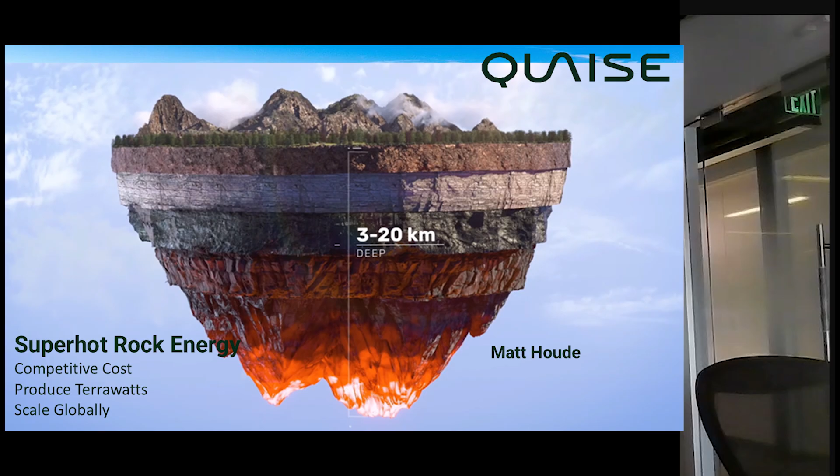This is definitely, as Russ said, some very exciting times in geothermal. Today, I'm going to talk about Quaise Energy and sort of our outlook and approach into how we want to develop and scale geothermal. And if there's one word or phrase I could leave with you in relation to Quaise and sort of our vision, it's going to be this second line here in the lower left, which is produce terawatts, or geothermal at the terawatt scale.

If you may be familiar, world energy demand, not necessarily energy consumption, but online power demand is on the scale of terawatts, something on the order of 15 to 20 terawatts. That's a number that includes all use of electricity, all use of burning fuels for transportation, for heating. And when we talk about decarbonizing the energy system of the US and the world at large, this is the scale that we need to think of.

And Quaise's vision in terms of how we approach geothermal is to realize exactly that, to develop an approach to geothermal that can produce geothermal energy at the terawatt scale, at the same scale at which the existing oil and gas industry adds energy products to the world energy system every year.

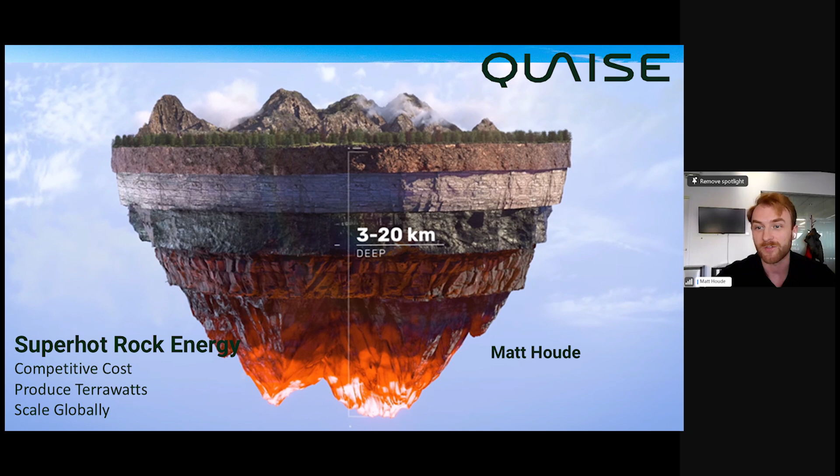Just a brief note on some of our current investors, partners, and industry relationships. A few I'll highlight here is that to date, Quaise has raised close to 95 to 100 million in private venture capital, and we are planning to raise a larger sum sometime this year on the order of 200 to 300 million to realize our goals. We've certainly benefited from our investors, our academic and government partners, especially those within the Department of Energy that helped us very early on with an ARPA-E funded project we had on our drilling technology, and certainly wish to continue those relationships in the future.

But I do think, as a rough order estimate, these are accurate in showing that with our current projections of how we are approaching decarbonization in the energy system, we aren't necessarily close to this goal of realizing a fully decarbonized energy system worldwide in 2050.

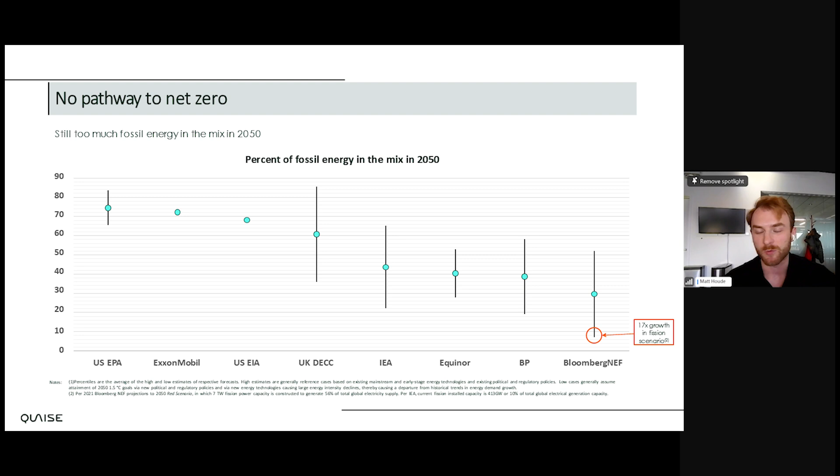Now, that is owing to several factors, one being, of course, that energy transitions have tended to take place much slower than they are currently, although they've not necessarily had the demand or constraint that we currently have with country and nationwide goals to decarbonize their energy system. But something that I think is missing in these projections that would affect the picture is the availability of a scalable, power-dense source of firm, or what you could call baseload, clean energy.

As it stands today, beyond wind and solar, the two leading clean energy deployments today, which are intermittent, our main available baseload source of clean energy to date has been nuclear fission, which is quite limited in its ability to scale rapidly and worldwide owing to various economic and geopolitical constraints. But an untouched fruit here in having a source of clean, firm power for the energy system of the future is geothermal energy.

Geothermal has been developed and deployed worldwide for over 100 years for electricity generation. If you'd like to expand that to use cases of heating, you could say geothermal is one of the oldest sources of energy we've had, in the form of hot springs used for various heating needs. But for the past 100 years, geothermal has been tapped as a source of energy to produce electric power at temperatures typically ranging from 200 to 300 degrees Celsius.

More recent progress and deployment of geothermal has actually focused on lower temperatures that have been accessible with some of the technologies available today. But Quaise, where we're quite interested in scaling geothermal more rapidly, is targeting super hot temperatures. So, improvising here on some missing slides, Quaise, in developing and advancing geothermal to the terawatt scale, is targeting something we call SuperHot EGS. And let me provide some color on different formats of geothermal and how SuperHot EGS differs from those.

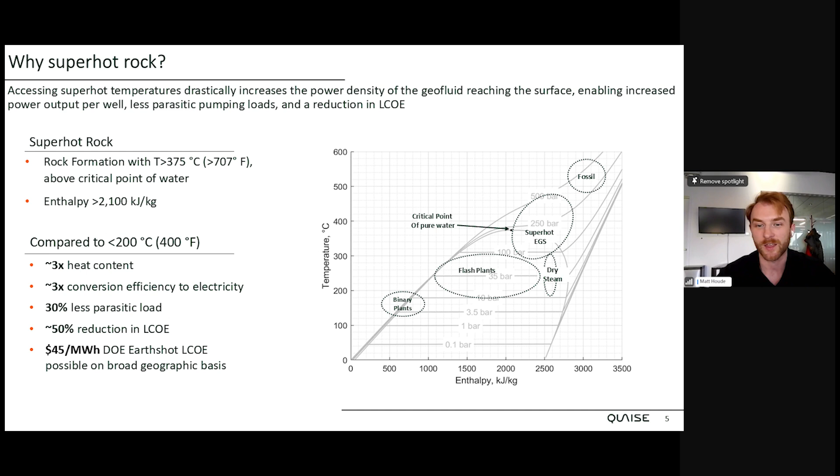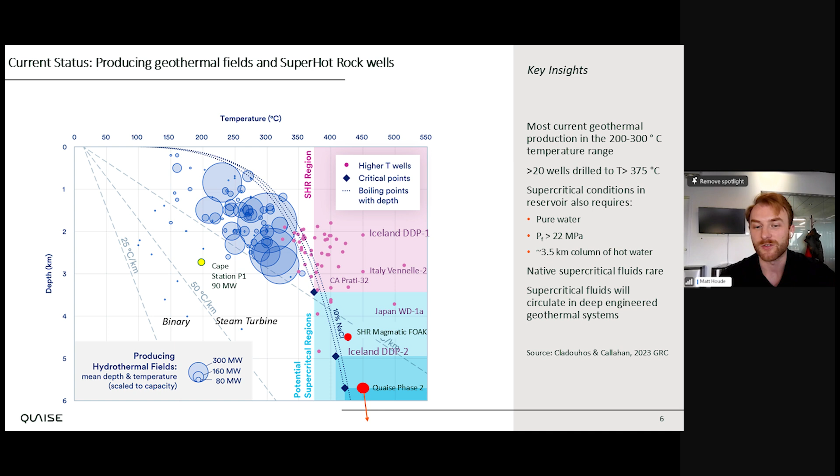Where we would like to take that approach to EGS is to the red bullets you see here in the lower right, first targeting 400C at a relatively shallow location, likely a location where you have some sort of volcanic or magmatic anomaly, before then beginning to progress the depth at which we can develop this super hot EGS resource.

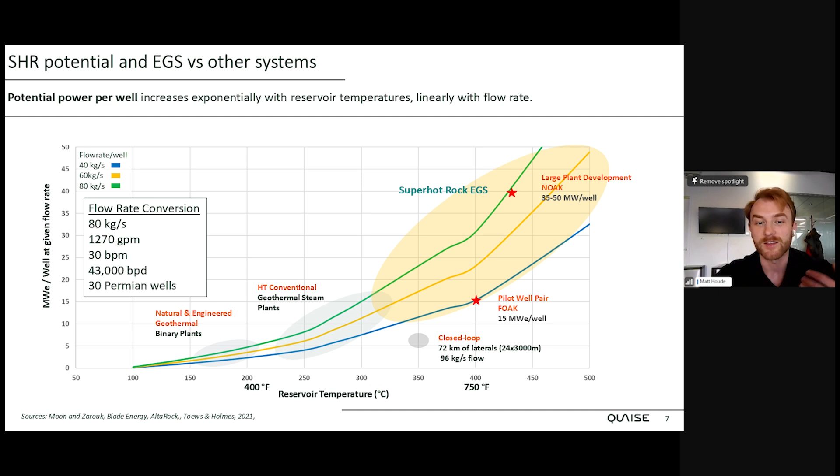And I think this is a pretty compelling number if we can achieve it, because if you look at oil and gas wells producing on the order of 1,000 barrels per day, which I think is a fairly average oil and gas well in today's industry, that's producing the equivalent of 25 megawatts electric power. And so if we hit these numbers, we're producing geothermal wells that in terms of energy density look more like oil and gas wells than the geothermal wells that have been developed over the past 100 years.

How does that relate to cost? I think with a lot of geothermal development so far, and especially the EGS fields that are going to be developed in the near term here, we're looking at something on the order of $80 to $150 per megawatt hour for the levelized cost of electricity.

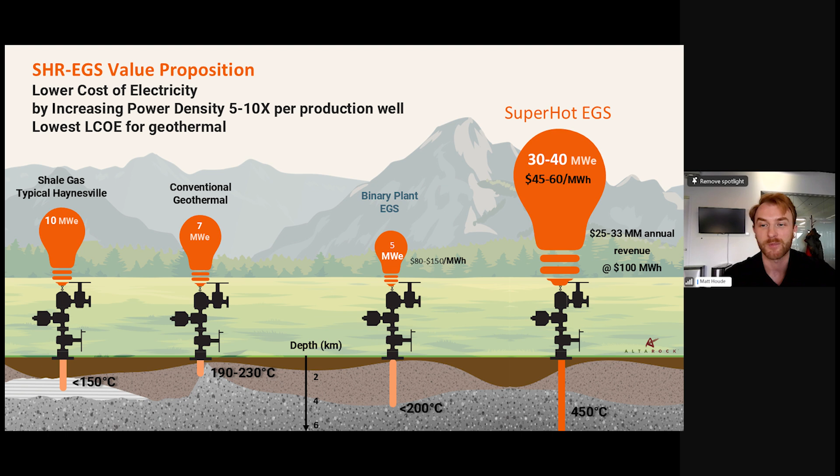We believe as long as we can maintain linear increases in drilling costs and the stimulation costs to create these fractured reservoirs, we can achieve something much more on the order of $45 to $60 per megawatt hour, which makes geothermal competitive, if not superior in cost, to the coal plants and combined cycle natural gas plants that are on the grid today, providing baseload power in our current energy system.

So at Quaise, what we're seeking to achieve is unlocking a pathway to this cost-competitive, scalable geothermal through SuperHot Rock. We believe these SuperHot Rock resources are widely available in the Western U.S. at depths of 7 to 12, 15 kilometers. And if we can achieve drilling and creating reservoirs at 12 to 15 kilometers, we've unlocked large swaths of the eastern U.S., and this also applies to much of the world at large.

We can scale geothermal beyond the locations it is today and achieve an approach to geothermal that can deploy annually at the scale of gigawatts to tens of gigawatts in annual installations. Our technology development within the company is focused on two prongs, one of which is developing the technologies and techniques for developing these EGS reservoirs at these very high temperatures, which is not a trivial feat with respect to the understanding of the rock, as well as the equipment, tools, and electronics that are required downhole.

The second prong, which I think is the most critical prong here, is our millimeter wave drilling technology, which is an approach we've been developing to drilling that we believe can enable this economic access to these super hot temperatures at great depths. Because the challenge, of course, in unlocking super hot EGS at scale today truly is drilling down to those target depths. There's only less than a handful of locations in the US where we think we can hit these super hot temperatures above 5 kilometers depth.

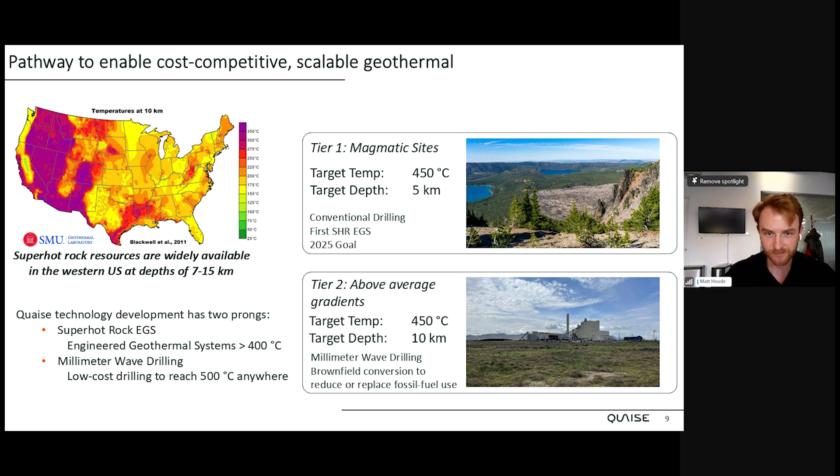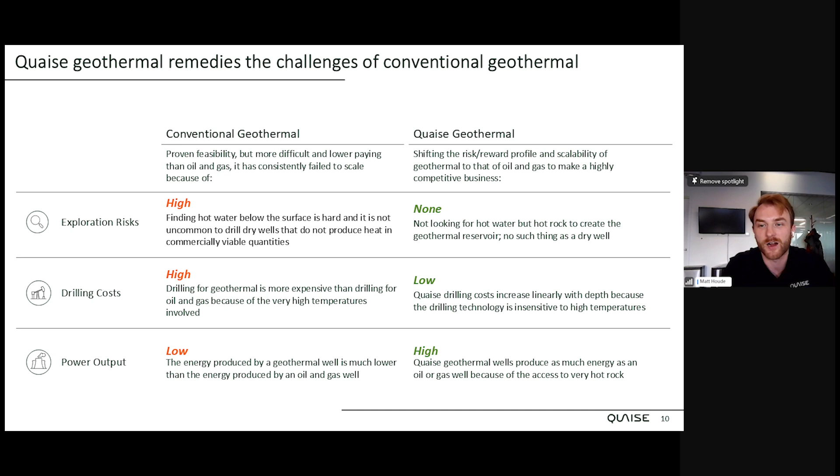We are simply drilling to the target depth with our drilling technology and creating the reservoir at those depths and temperatures. The drilling technology is intended to reduce the drilling costs that are expected to become exponentially more expensive with depth and temperature, again, owing to those very high temperatures. And finally, power output. Producing geothermal wells with energy output similar to oil and gas wells compared to the geothermal wells in operation today. And so there's a lot of promise and value here, provided we can execute on the technology and development roadmaps that we are currently progressing through.

What is this millimeter wave drilling technology and how does it work? Our basic approach is to replace conventional drilling, which involves mechanical drill bits, downhole tools, mud motors, drilling muds to circulate rock cuttings into and out of the hole. We are intending to replace all of those components essentially with an energy matter interaction by delivering high power microwaves down a pipe in the hole called a waveguide to rapidly heat and ablate the rock material that is at the bottom of this hole, and then remove that material with a purge gas that we are circulating down our pipe.

So we are generating this energy at the surface with a device called a gyrotron. We're transmitting that energy down this pipe, which is the only component downhole, which greatly simplifies our downhole assembly compared to conventional drilling. Sending that energy down this pipe with a purge gas that we are injecting at the surface. This purge gas will mostly be nitrogen, but in some deeper settings, we may switch to argon at a certain target depth. And we utilize this energy and purge gas to both destroy the rock as well as remove the material we're producing from our drilling process out of this hole to convey it to the surface.

So the drilling process does look fairly analogous to air drilling, done widely today, mostly in mining, but has also been done for oil and gas drilling, and in some geothermal drilling campaigns where air drilling was advantageous. For us, because we are producing rock particulate from this drilling process that is much smaller than traditional cuttings, we have confidence that an injected purge gas fits the bill in terms of removing the material out of the hole while we continue drilling.

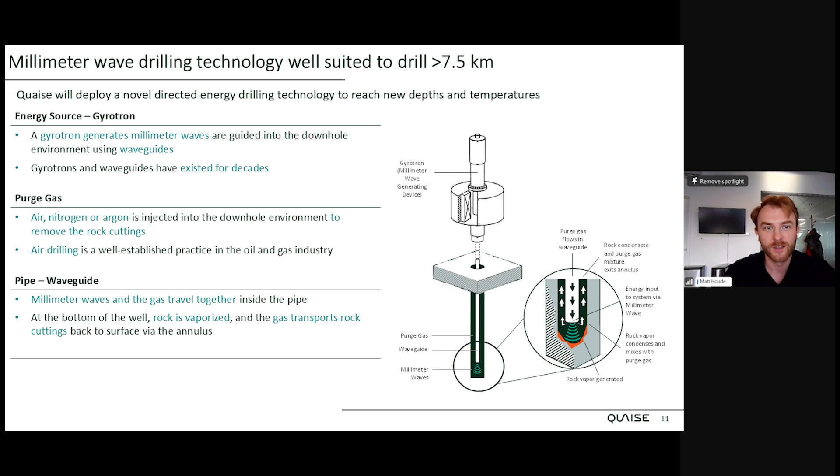Some of the key features here of our millimeter wave drilling process. The first is how we are generating this microwave energy at the surface, which is this device shown here called a gyrotron. Gyrotrons have been around for about 60 to 70 years and have primarily been developed for nuclear fusion research. And in nuclear fusion, the reason they use gyrotrons is that they want to transmit very high power microwaves into a reactor, what they call a tokamak, and use that microwave energy to heat a plasma that they've ignited to temperatures where a nuclear fusion reaction takes place.

The millimeter wave drilling technology was conceived about 15 to 20 years ago by a researcher at the MIT Plasma Science Fusion Center by the name of Paul Woskov, who had an epiphany when learning about geothermal drilling to say, well, if we use these gyrotron devices for heating plasmas to millions of degrees Celsius, why don't we try using them for heating rock to 2,000 to 3,000 degrees Celsius for the purposes of ablating and drilling through rock? And that's where Paul got the idea to start to develop the fundamentals of millimeter wave drilling.

I'll be honest, you are talking to a geological engineer here, not a microwave engineer or fusion researcher. And so I may not be able to fully explain in clarity the full details on how a gyrotron device will work. But to point out some of the key components, a gyrotron is essentially a large vacuum tube to which you are feeding a high voltage input of electrical energy. Within that vacuum tube, that electrical energy is becoming an electron beam transmitting between a cathode at the bottom of the tube and an anode at the top.

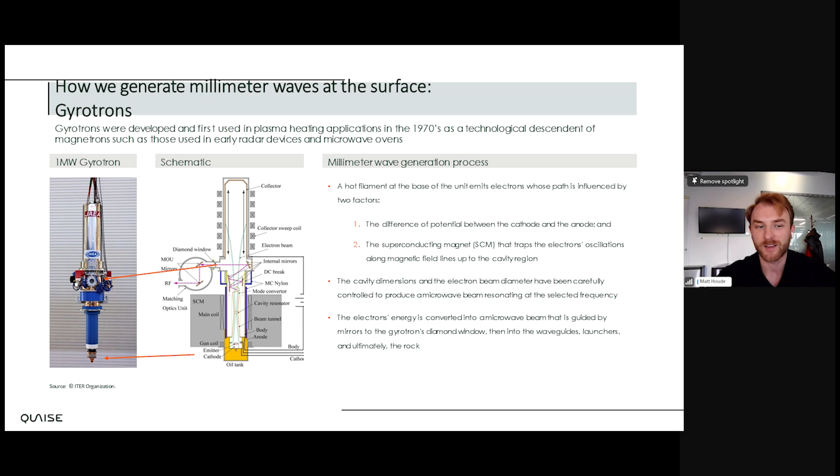I think a key aspect of this millimeter wave drilling assembly and approach is how we are transmitting these millimeter waves from the surface to the downhole environment. And that is accomplished with metallic corrugated waveguide. Waveguides were initially conceived, similar to gyrotrons, many decades ago, initially with the purposes of long distance communications. And they were quite thoroughly explored for their ability to convey energy, or in this case, information, tens of kilometers for long distance communications before the advent of fiber optic waveguides, which were able to accomplish this goal much more successfully with smaller components. But fiber optics are, in essence, strands of glass waveguides that convey light energy over long distances for the purpose of transmitting communications.

For us, we are interested in transmitting much larger amounts of energy through larger sized pipe for the purposes of geothermal drilling, which is why we look at waveguides and this millimeter wave spectrum for how we convey this microwave energy from the surface to the downhole environment. And the waveguides and frequencies that have been explored for nuclear fusion research are well suited for our goal of millimeter wave drilling. And with the sized pipes, say 4 to 4.5 inches, that we expect to use for geothermal drilling, in these theoretical ideal simulations, we see that we can transmit this energy 10 to 20 kilometers while losing only about 5 to 10% of that energy.

Now, in practice, we certainly expect our transmission efficiencies to be below that, but for early iterations, we're confident that for drilling distances of 10 to 12 kilometers, we'll be able to maintain energy transmission efficiencies higher than 50% as long as we execute successfully on the engineering and assembly of this downhole waveguide for conveying that energy downhole.

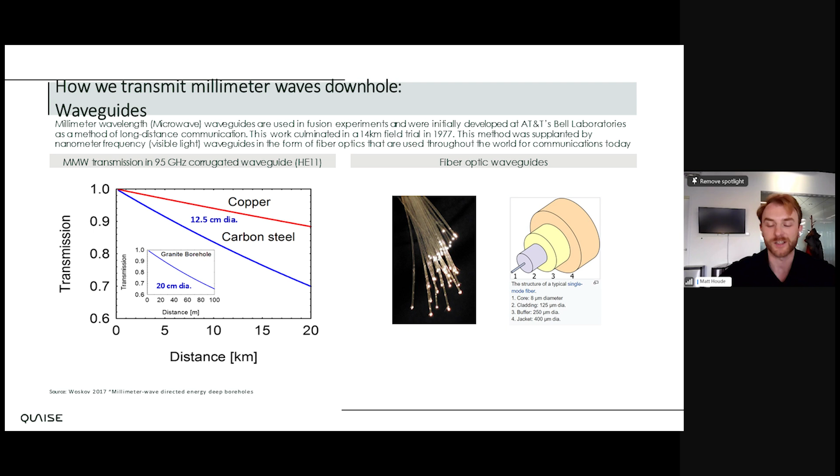A few notes on the drilling process itself. I've kind of moved past how exactly microwaves are drilling through and destroying this rock. And the process is actually one that I think this audience is all familiar with, which is dielectric heating. This is basically the same process that is used in your microwave oven when you are using microwaves to heat up your food. Food, and especially the water within that food, is a dipolar dielectric material. When you convey microwave or RF energy through a dielectric material that has molecules with this dipolar moment, they see that energy and they begin to want to oscillate, move around, vibrate.

This is what causes a temperature increase in the food. With our drilling process, we are doing exactly that, but we are transmitting such high amounts of energy into the rock to be absorbed that not only does that rock heat up, but it begins to change phase, it begins to melt, and it eventually begins to vaporize. And it is this combination of melting and vaporization by which we are able to ablate this solid rock into a very fine particulate matter that we can then convey out of our borehole environment through this purge gas that we've injected at the surface.

One interesting feature I'd like to note here in relevance to Hawaii is we observed early on that one of the ash byproducts we see from our drilling process are very fine strands of rock melt that are fairly analogous to Pele's hair, which is a very commonly observed volcanic deposit in the volcanoes of Hawaii, where we see melt droplets that are suspended in the air, and while still in their liquid phase, are stretched out to form these long fibers. So the ash or rock cuttings we're producing from this drilling process are very analogous to the types of volcanic products we see in a volcanic eruption in Hawaii, which I think is kind of interesting as a geologist, geological engineer myself.

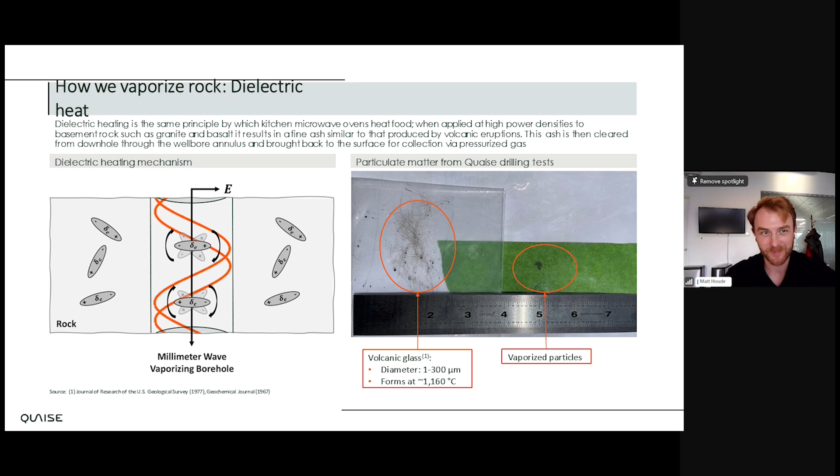Over the past couple years, we've done various experimental campaigns of the millimeter wave drilling process to validate some of the fundamentals as well as the approach to drilling in the lab while we develop and build the first field deployable millimeter wave drilling systems to mobilize for the first field trials. What I'd like to show on these two slides here are some progress in lab experiments we performed 3 years ago at our Houston Engineering Center. This was a fairly small hole that we drilled with a relatively low amount of power. We were using about 5 kilowatts of output microwave power, and we were also using a device called a klystron, which is a close cousin of the gyrotron, but not the device that we'll be using for future and current testing.

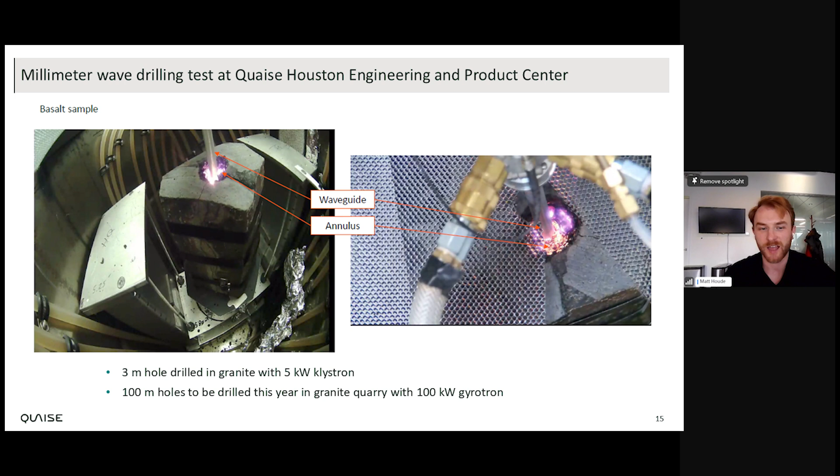What you see here in this photo is a rock target in the lab and a borehole, which is shining quite brightly. That pipe you see going into the borehole is a waveguide, which is where the microwaves are being sent down. And the rock cuttings are basically being produced out of this borehole annulus and blown out by the purge gas that we are injecting. And that's what you'll see here on the video I'm showing here. You'll see what look like sparks to be coming off of the hole, and that is actually this hot rock melt that is, of course, pretty high temperature once it is ablated off the rock surface.

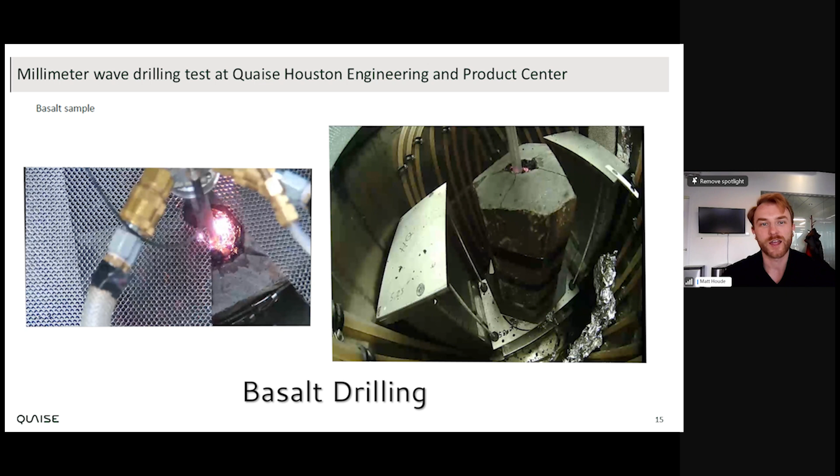Here in this later video, you're seeing that hole begin to deepen. We monitor the drilling progress with various remote diagnostics, probably most importantly, a radar diagnostic that tells us the depth to which we've drilled. And as we continue to drill and monitor that progress, we can, in this lab experiment, stroke the rock into and out of the waveguide to deepen the hole further. What we are doing in the lab today is now doing away with sort of this translating rock target, and we are beginning to translate our waveguide down into the hole with a drilling rig and dynamic waveguide system that we are actually currently testing at our Houston facility today out in a yard setting.

So in terms of the current progress, we are drilling with a lot more power than the videos you just saw, drilling with on the order of 50 to 100 kilowatts of output microwave power and drilling at speeds exceeding a meter per hour for borehole diameter sizes ranging 3 to 4 inches in diameter. In this month and over the next month, we are validating that drilling recipe with a drilling rig, drilling shallow rock targets in place outside our facility, ranging up to 10 feet depth. And that is being done in preparation for our first field trial of the drilling technology that is going to be mobilizing sometime in April or May of this year.

I think I've gone over some of these points, but just to reiterate some of the benefits of millimeter wave drilling, a strong one is the simplification of the downhole assembly that we believe will negate the limitations to drilling to higher temperatures at greater depths. Today, we are able to drill into very high temperature settings with conventional drilling, but not only is it slow, it is limited, I think, in the depth at which we can go, owing to the fact that as we go deeper, we aren't necessarily able to continuously circulate the drilling muds and drilling fluids that can maintain cool operating temperatures for all of the equipment involved in a conventional drilling assembly. By comparison, millimeter wave drilling involves one downhole component, which is this pipe, the metallic waveguide. And so we remove the types of tools and electronics that would be inclined to fail at these higher temperatures.

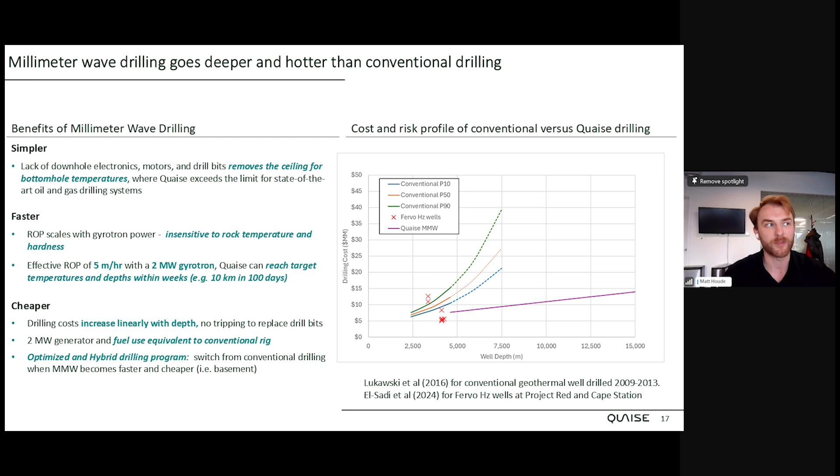Some of the challenges I'd like to note, of course, just to be honest, with millimeter wave drilling. One, of course, is that we are repurposing technologies that have been developed for one-off nuclear fusion research projects and repurposing them for drilling applications in the field, where we're taking them out of a controlled lab setting and putting them out into robust field operation where they can be exposed to a variety of elements, whether that's high heat, whether that's cold, freezing temperatures, rain, wind. These are all conditions these technologies have not been exposed to date.

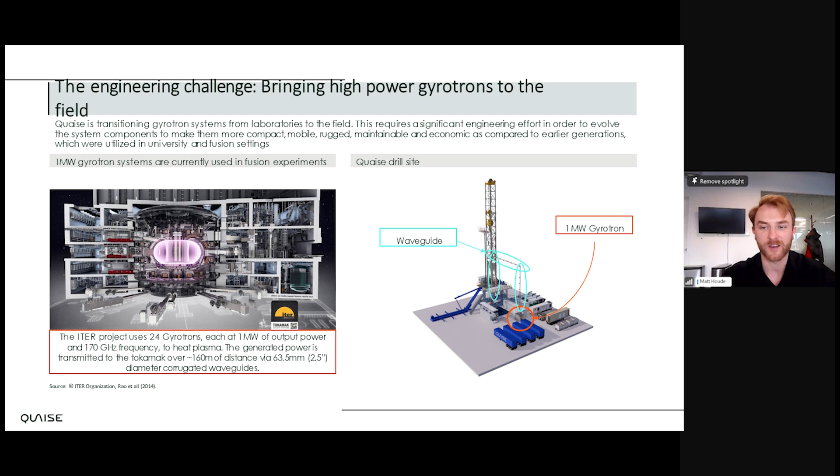And so much of the work our engineering team has been focused on over the past couple of years is building the packaging for these systems such that they can be mobilized into a field setting and be protected from those elements, as well as being robust for this type of operation we're doing with drilling, which is quite different from the types of one-off research experiments they have been used for in nuclear fusion research to date.

Another challenge I'd like to note is drilling very, very deep holes. To date, there has been only one well that has been drilled to exceed more than 10 kilometers vertical depth, and that was the Kola borehole drilled by the Soviet Union. One thing I'll note about that borehole was that they took about 20 years to drill that hole to its target depth. And so there's certainly been tremendous improvements in conventionally drilling to go deeper at much higher speeds.

This is a shared challenge for our drilling approach, as well as competing novel and conventional drilling approaches to access these temperatures, is how we drill the deepest boreholes to date and do this repeatedly such that we can unlock access to this super hot geothermal resource independent of locations where geothermal is favorable today. And so that implies a host of challenges for wellbore stability with our drilling technology. One is, of course, understanding how we can drill deep holes in this underbalanced type drilling condition where we're not utilizing drilling muds to stabilize the borehole while drilling.

Another important one that I have not noted much on our previous slides is the vitrified liner, which is an outer region of the hole that is molten, but is not necessarily ablated or vaporized. And so this outer layer stays behind in the hole and remains as sort of a glass ceramic liner, somewhat analogous to, say, obsidian as a rock glass that remains in our borehole post-drilling.

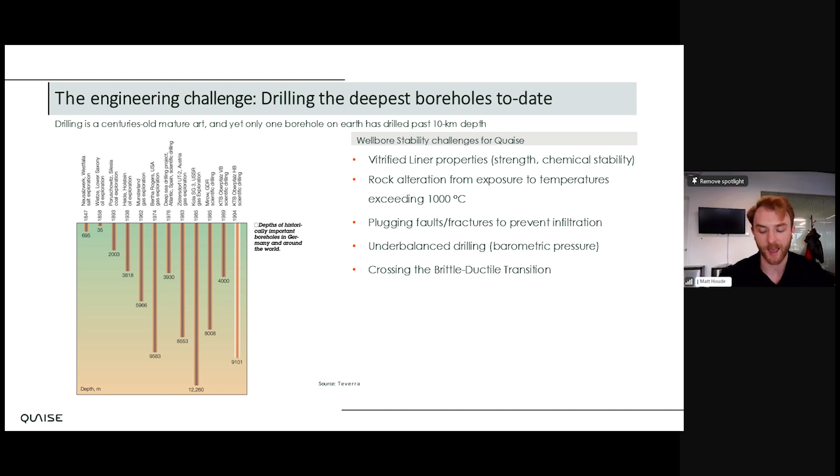And certainly a large work stream of research we plan to do over the next couple of years is understanding how we could potentially optimize this vitrified liner, as well as the thermal alteration to the borehole, to understand whether we can use that liner to potentially stabilize this underbalanced borehole for drilling to much greater depths than what we do today.

Some notes on the roadmap. I mentioned about 15, 20 years ago is when this concept came about at MIT.

We founded Quaise in 2018 with the purpose of commercializing this drilling technology, and over the past couple of years have demonstrated significant improvements in the drilling results in the lab compared to what's achieved at MIT.

What we are doing today is taking these technologies out of the lab and into the field, which we plan to do this year with our first field trial, targeting an initial drilling depth of 100 meters before scaling that to a kilometer depth in 2026. And by 2027, 2028, we'd like to optimistically say we mobilize millimeter wave drilling for its first drilling campaign for a geothermal project.

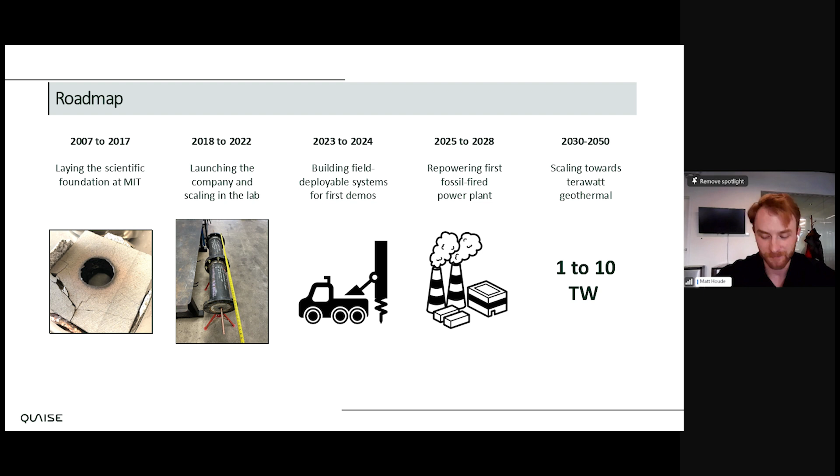Now, most of the discussion today, I've focused on the drilling technology, but I would like to note that there are a variety of technology challenges and needs for developing this SuperHot EGS resource at these depths and temperatures. Drilling is one side of the equation, but a very important aspect is how we complete these wells to tolerate the temperatures and loadings that they can expect.

So this is the casing and cement that we would expect to install downhole for this permanent wellbore completion, ensuring that it keeps the borehole open and is able to accommodate both the reservoir creation aspect as well as the production from this EGS reservoir. And there are a host of materials involved in this reservoir creation process that we need to mature to withstand these higher temperatures at greater depths.

Things like proppants that are going to be in place within the fractures to keep these fractures open while we are producing the hot fluid from the reservoir. Things like the casing itself, the metal pipe lining this wellbore, ensuring they can tolerate those high temperatures.

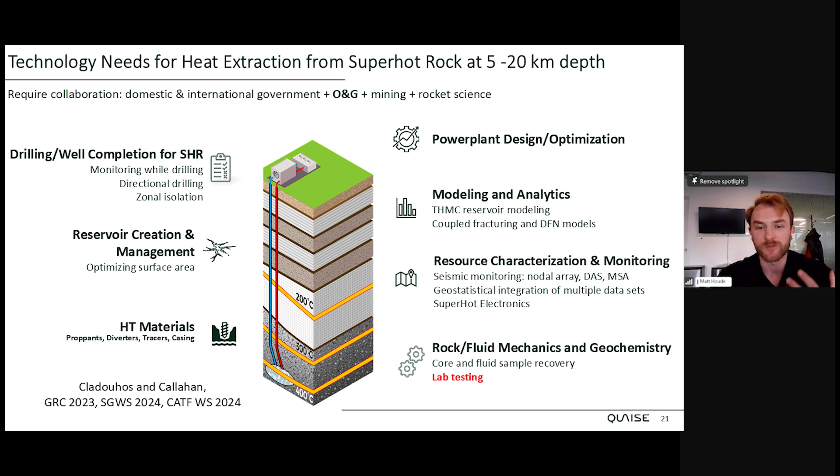There are still learnings required in understanding the best approaches to creating these fracture networks that connect multiple wells, ensuring water is flowing uniformly through those fracture networks such that it is not concentrating in one zone and risking rapid thermal drawdown, or what we call short circuiting in the EGS space. There's a great deal of learnings needed in that focus before we can successfully develop these EGS reservoirs at any temperature, let alone super hot EGS temperatures.

One area of research I would say novel to super hot EGS and what we're doing at Quaise is the rock fracture mechanics in the brittle ductile transition. By targeting these temperatures, we expect rock in these regions to nominally fail more in a ductile manner, where deformation is not necessarily localized in singular planar fractures, but could result in more of these distributed complex cloud fracture networks noted here.

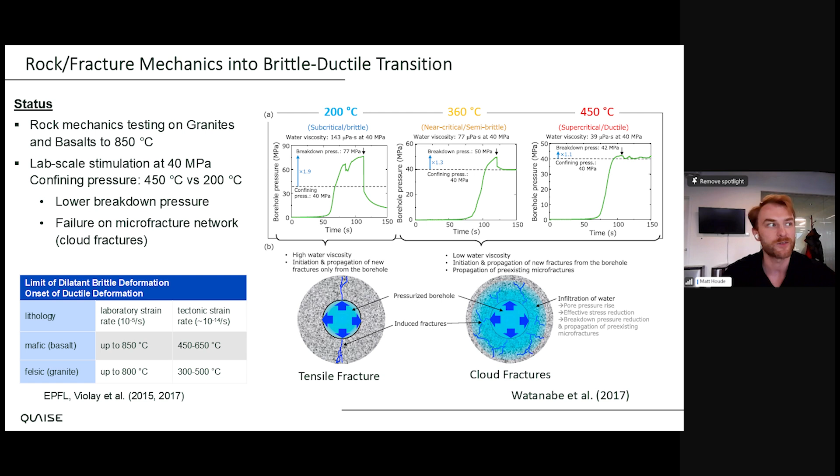These images and charts are based on some lab research that's been done in Japan over the past couple years, and Quaise has currently been involved with lab experiments in collaboration with EPFL University in Switzerland to better understand these fracture mechanics at the types of temperatures and pressures where rock begins to become nominally semi-brittle to even ductile. And that's something we are planning to de-risk here in the coming years with some lab experimental collaborations we are helping support with universities like EPFL and additional universities that can help us understand key aspects such as the interaction of fluids and rocks at these temperatures and pressures.

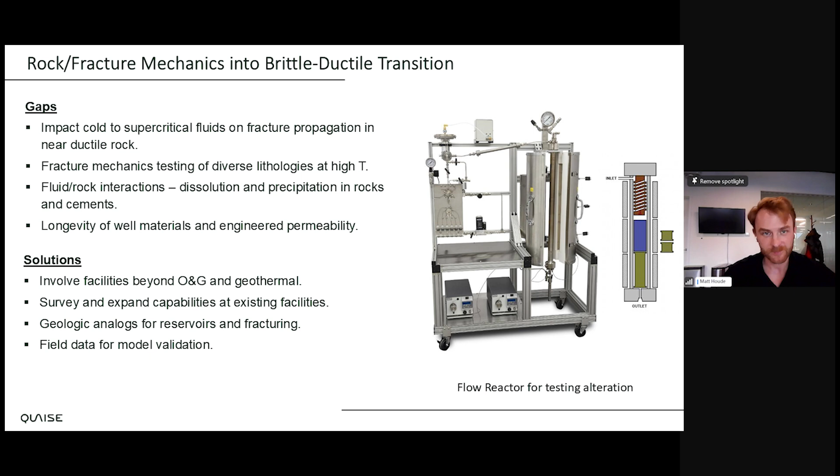One other area of research, of course, is the conceptual model for EGS and what is the best conceptual model for creating a well-connected fracture network between wells. The past 30, 40 years of EGS has focused on this shear stimulation model where you inject cold water down open hole intervals to stimulate and enhance permeability along large, naturally occurring faults and fractures. Not only has this approach had limited success, but it's also proven to be somewhat risky with respect to inducing seismicity, resulting in projects being shut down in Switzerland and South Korea.

And so in the past 5 years, there's been a lot more momentum in this planar hydraulic fracture model that is much more identical to what's done in oil and gas today. And this is the model that Fervo Energy, I believe, is currently leading with in terms of how they plan to create a fracture network. In other words, drilling long lateral wells and connecting those wells with tens, if not hundreds, of hydraulic fractures that you are initiating at the wellbore that are conceived to be somewhat of this planar geometry.

Some of the models that we are interested in exploring for SuperHot EGS are this hybrid fracture model, which is a combination of the planar hydraulic fracture and shear stimulation along natural fracture model.

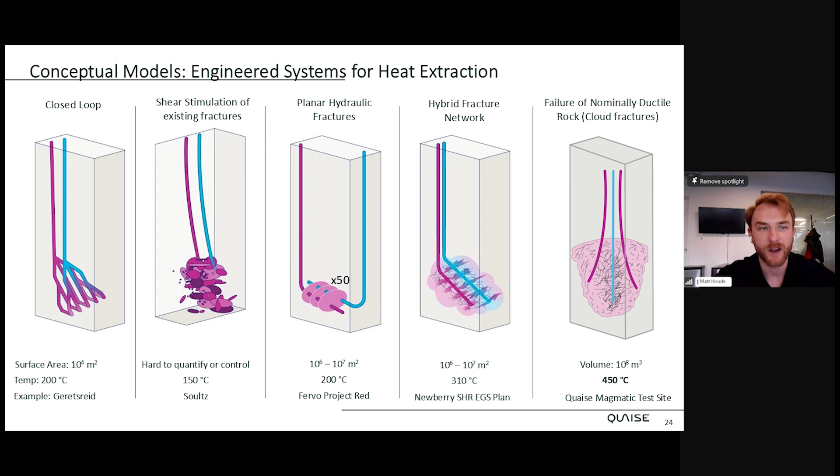And the final model, which is more speculative at this point, but could prove more omnipresent at these super hot temperatures, is this cloud fracture model that's been observed in lab experiments with semi-brittle ductile rock. In other words, creating a much more complex omnidirectional fracture network owing to the varying fracture mechanics at these temperatures and depths that we are planning to target.

One final area of research on EGS I'd like to touch base on are the reservoir models and fracture modeling for EGS at these conditions. No projects for fracturing or even geothermal to date have really targeted the temperatures and rock deformation regimes in terms of brittle versus ductile that we are targeting. And so there is a need to mature the types of reservoir models that are able to accurately simulate how we fracture and produce heat from those fractures in a reservoir over the duration of years, the tens of years.

And so this is an area of research we have supported with a researcher at the University of Iceland to best understand how the changes in temperature and pressure and rock mechanics may affect the evolution of these reservoirs over the period of production. And this is certainly an area of research Quaise will continue to support in the future as we begin to gain potentially some real field data and learnings to test these hypotheses from the geothermal projects we plan to develop in the coming years.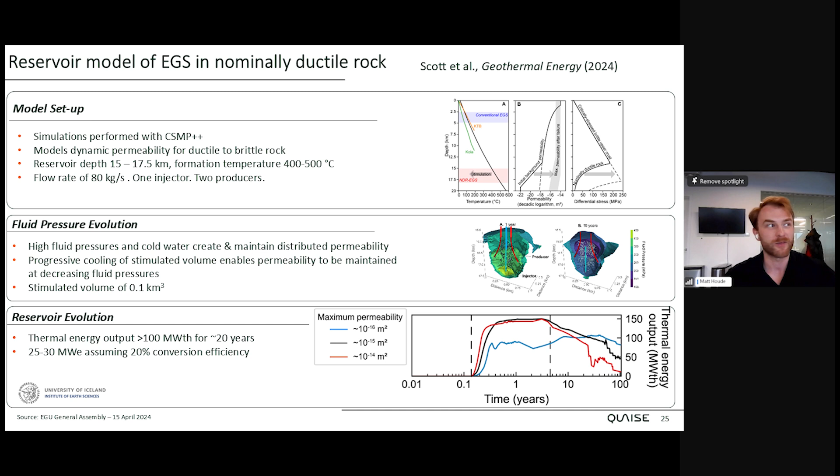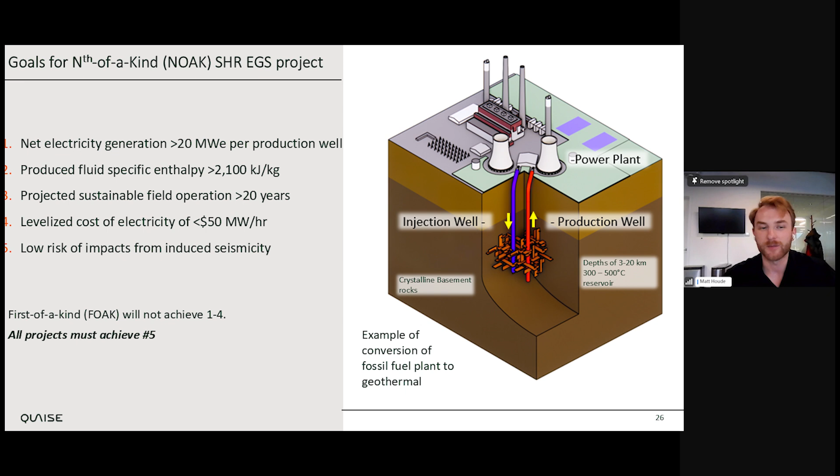I think with that, this is kind of hitting my last few slides here. So I'll just note in terms of achieving an nth of a kind super hot EGS project, we want to achieve this 20 megawatts electric power per production well value, being able to produce that fluid over periods of greater than 20 years at these competitive levelized costs of electricity. And very important to us, EGS in general, minimizing, if not eliminating, the risk of impacts from induced seismicity.